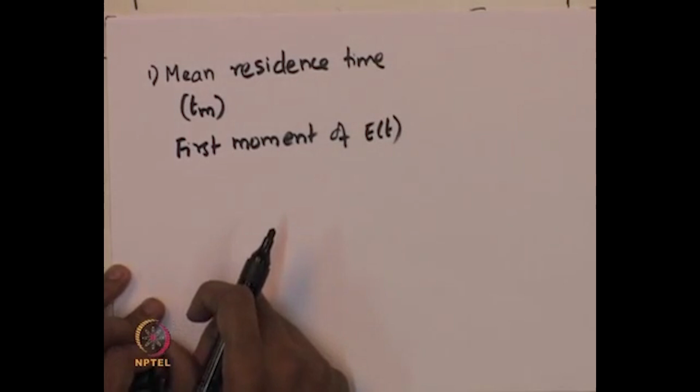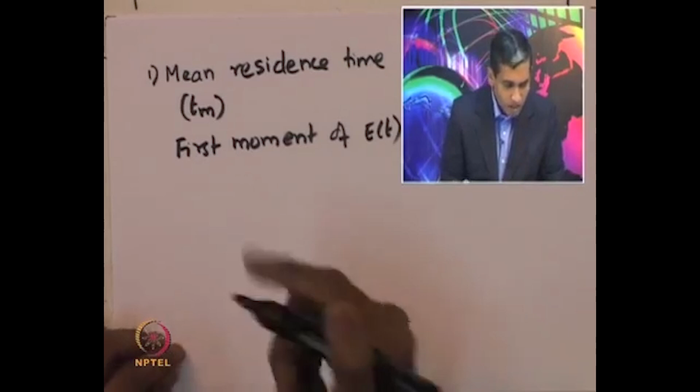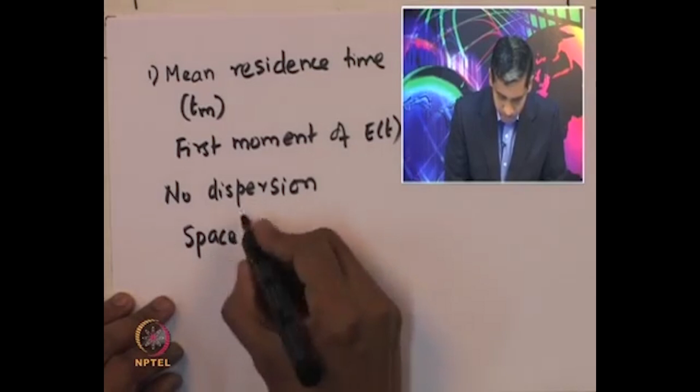So, E of t is actually a distribution, and that distribution can be used to decipher some of the properties of the distribution itself and some of the properties of the reactor system. For example, mean residence time is an important property that is used to control various things in the system. When there is no dispersion across boundaries, that is between the point of injection and the entrance of the reactor, then in these situations the space time tau, which is equal to V by the volumetric flow rate with which the fluid is flowing through the reactor, is equal to the mean residence time itself.

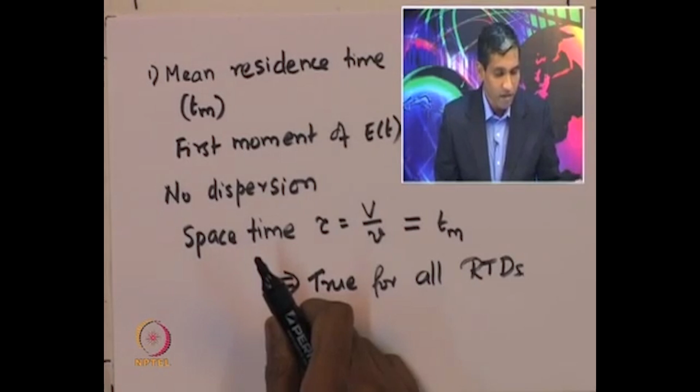Now, this is independent of any RTD function that is representing the non-ideal behavior of the reactor under no dispersion conditions. Irrespective of the RTD function, the mean residence time that we obtain would be exactly equal to the space time of the reactor itself. So, this is true for all RTDs, all residence time distributions, irrespective of what type of reactor, as long as dispersion is absent. So, now let us look at how to calculate the mean residence time from the residence time distribution function E of t.

So, T m, the mean residence time, is given by the first moment, as I mentioned a few moments ago, that is integral 0 to infinity t into E of t dt divided by integral 0 to infinity E of t dt. Because the integral of the E curve between 0 to infinity is equal to 1, this expression can be simplified as integral between 0 to infinity t into E of t dt. So, that is the expression for the mean residence time if the RTD function E of t is known; one can simply plug it in and find the mean residence time.

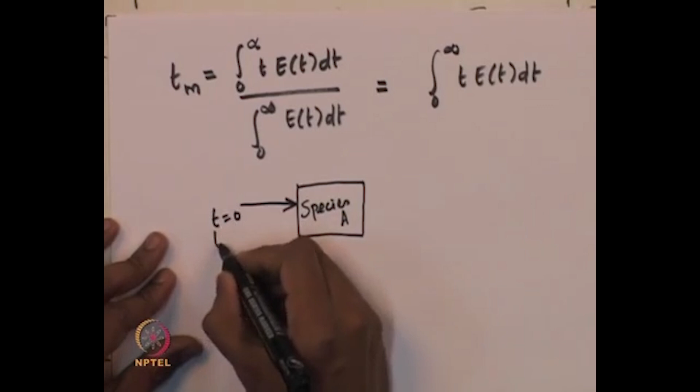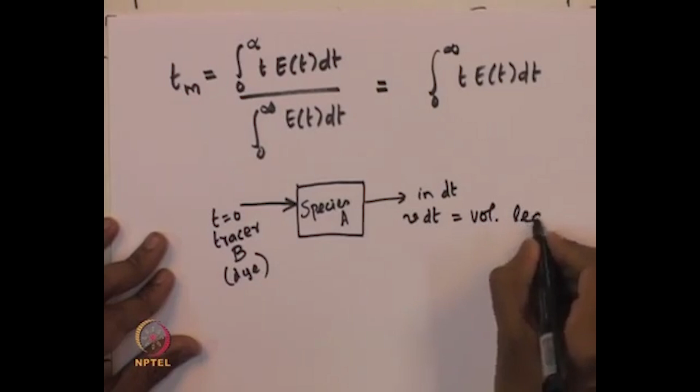Now, let us consider a reactor and assume that it is filled with species A, and at time t equal to 0, a tracer species B, let us say a dye, is injected into the reactor. The amount leaving the reactor in time delta t, whose age lies in that interval, is given by nu times dt, where nu is the volumetric flow rate with which the fluid leaves the reactor, that is the volume of the effluent stream leaving the reactor, not the tracer. So, now suppose we want to know that the species has been there for a long time.

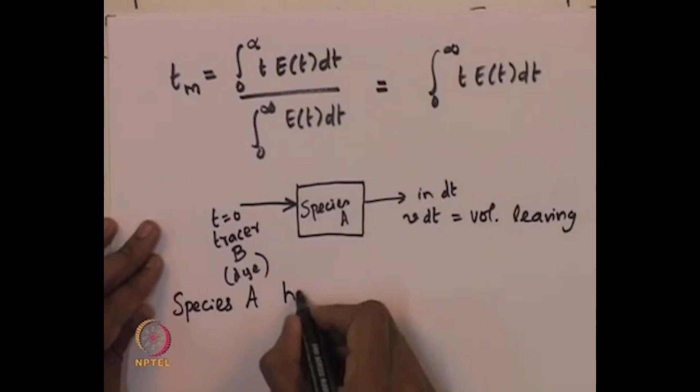So species A has been in the reactor for a long time. Remember nu dt is the volume of the effluent leaving the reactor in this time dt, and if you want to know the volume of species A leaving in that time delta t, that will be given by dV, which is equal to the total volume of the fluid leaving the reactor multiplied by 1 minus F of t. So, F of t is basically the fraction that has been in the reactor for time which is less than t.

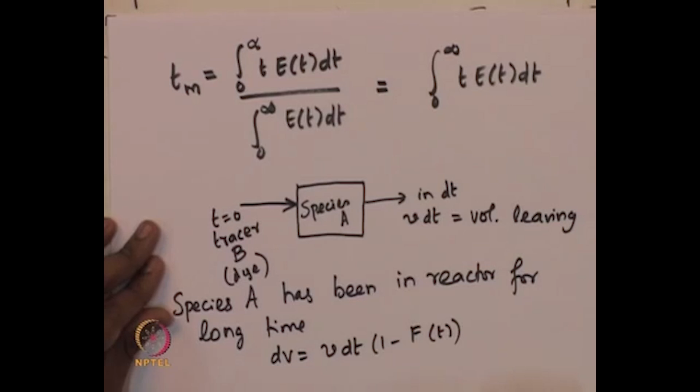So, this is the fraction in the reactor residing for time larger than t. Okay. So, 1 minus F(t) multiplied by the volume of the effluent stream will tell us the amount of species A which is leaving the reactor in that small time dt.

So, now if we sum this over all the molecules of A, then that will tell us the net volume of the species leaving the reactor. So, if we sum over all A molecules, the total volume that is leaving is given by integral 0 to infinity V dt into 1 minus F(t).

So, from here we assume that the volumetric flow rate with which the fluid stream leaves the reactor remains constant. This is generally not true for gas streams, but it is normally true for liquid streams leaving the reactor. If it is a gas stream operated under constant pressure and isothermal conditions, that is constant temperature, and if the number of moles does not change because of the reaction, then one may also assume that the effluent stream volumetric flow rate remains constant.

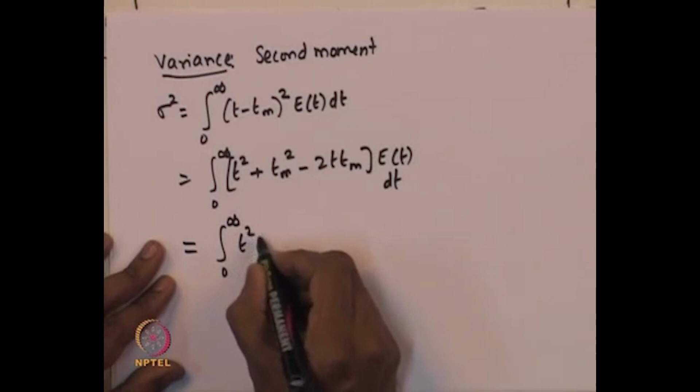So, the sigma square, which is the variance, is given by 0 to infinity (t minus T m) square into E of t dt. And so, now if we expand this square term, we can expand this as 0 to infinity (t square plus T m square minus 2 into t into T m) into E of t dt. So, that is the integral, and this is nothing but 0 to infinity t square E of t dt minus T m square.

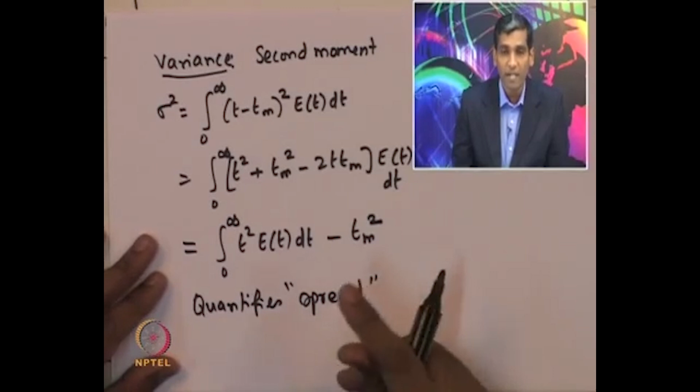So, the variance essentially quantifies the spread in the distribution of the RTD function. So, that is another property that is actually very commonly used in the real systems. And the third property, not very commonly used, is the skewness property. It is called the skewness, and that is obtained using the third moment of the distribution,

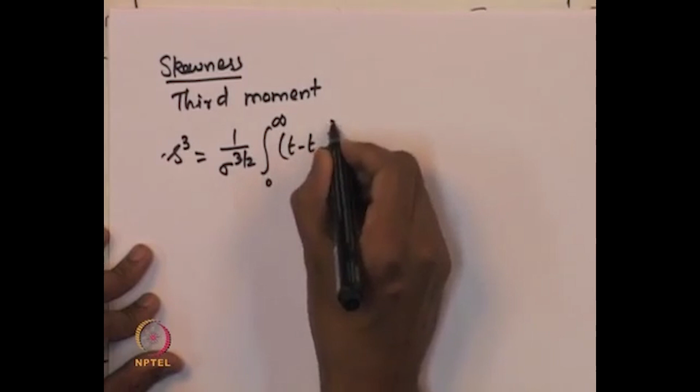and that is given by, if S is the skewness parameter, 1 by sigma to the power of 3 by 2, where sigma is the standard deviation, that is square root of the variance, into 0 to infinity (t minus T m) the whole cube into E of t dt. So, that is the skewness, and this basically reflects the extent to which the residence time distribution function is skewed.

So, now once we know these properties, the next question is, from real reactor data, suppose there is a tracer that goes inside, is it possible to estimate some of these parameters, and what are the steps involved? Okay. So, let us look at how to calculate the mean residence time and sigma square from the actual data.

So, normally the actual data that one would get is the measurement of concentration as a function of time. So, let us say that several concentrations have been measured, from time 1 to 10, and concentration C t has been measured. So, then one needs to create a table where as a first step one calculates E of t. We know the formula for E of t, which is essentially given by C t divided by the integral of C over the whole time domain,

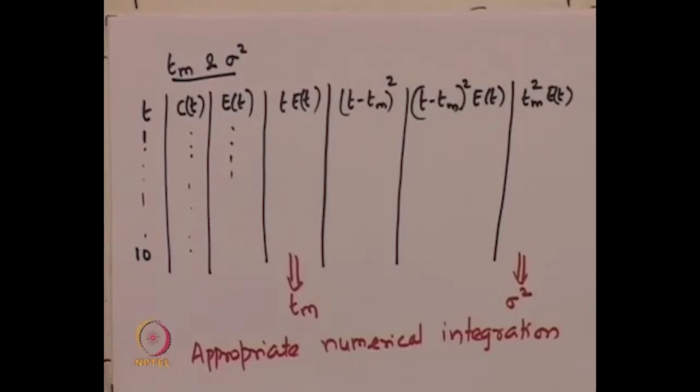In order to complete this table. Once this table is complete, we will be able to estimate the mean residence time and the variance for the distribution that represents the RTD function for the reactor.

Now, suppose there is a reactor and we know the RTD function, okay. Suppose we know the E curve for a given volumetric flow rate V 1. Now, we want to find out the E curve or the RTD function for a different volumetric flow rate. So, let us consider the situation where we are feeding the reactor with a fluid of volumetric flow rate which is less than V 1.

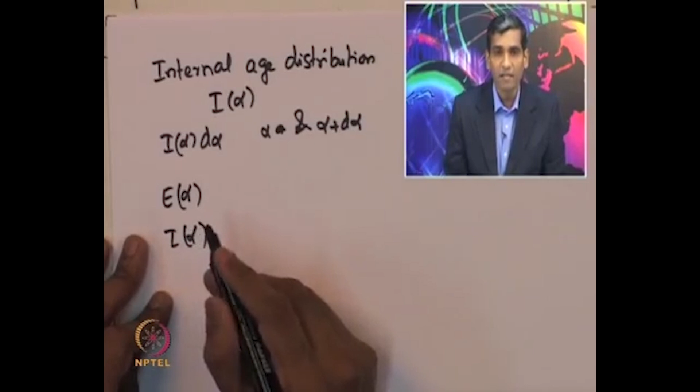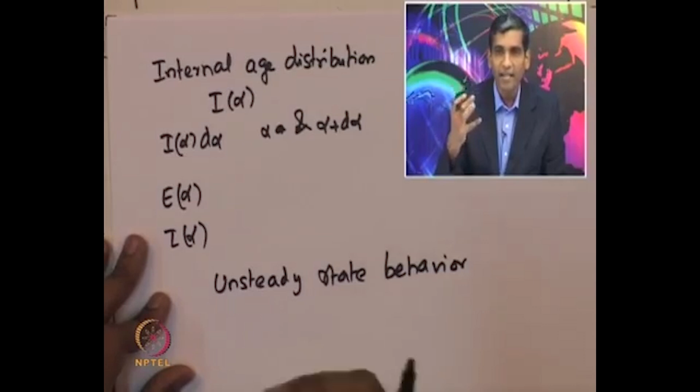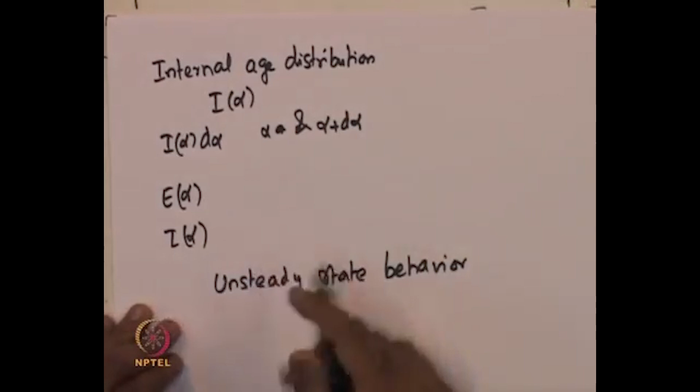So, these two have their own utility, and particularly the age of the fluid elements present inside the reactor has significant importance when one wants to study the unsteady state behavior of a particular reactor. A good example would be a catalytic reaction where the catalyst is decaying with time; then it is important to know the internal age distribution and to consider it in modeling the performance of such a reactor.

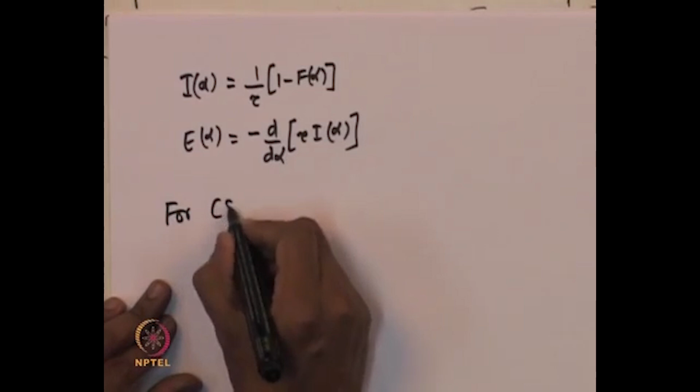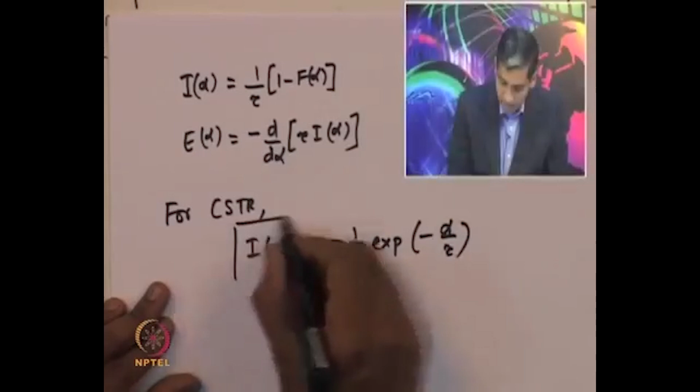So, I(alpha), the internal age distribution, is given by 1 by tau into 1 minus F(alpha), and E(alpha) is given by minus d by d alpha of tau into I(alpha), because of the connection between the E curve and the F curve. So, the relationship between the E curve and the I curve is E(alpha) equals minus d by d alpha of tau into I(alpha). Now, for an ideal CSTR, I(alpha) is given by 1 by tau into exponential of minus alpha by tau. So, that is the internal age distribution for a CSTR. After all these definitions, the E curve, F curve and I curve, and the mean residence time, variance and skewness, let us look at the residence time distribution in ideal reactors.

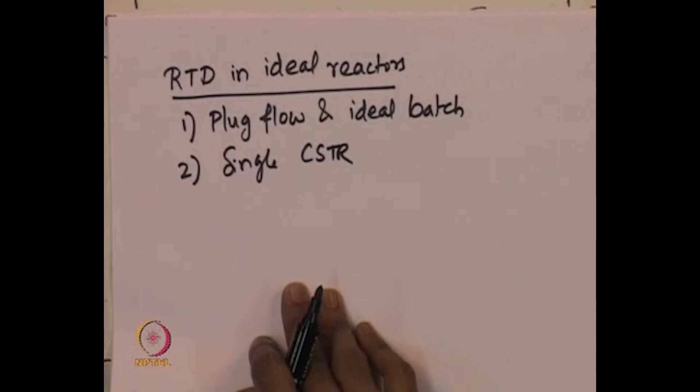So, particularly we will consider two cases. One is plug flow and ideal batch reactor, and the second one is the single CSTR case. So, these two we will look at, and we will attempt to find out how to get the RTD curves for these two types of ideal reactors.

So, let us first consider the plug flow reactor. What is the property of the plug flow reactor? All atoms or all molecules of the material entering the reactor will spend exactly the same amount of time before they leave the reactor, which means that all elements will have exactly the same residence time. So, same residence time for all fluid elements entering and leaving the reactor.

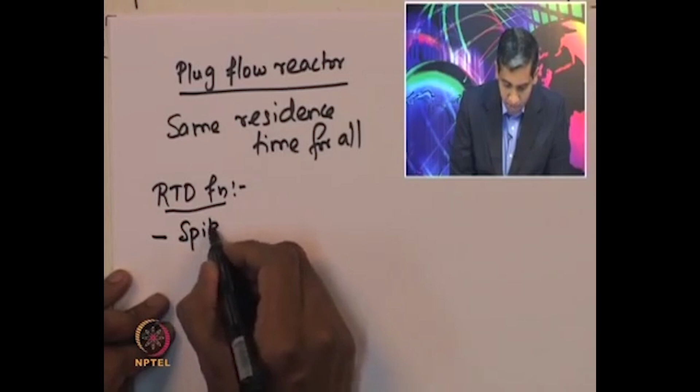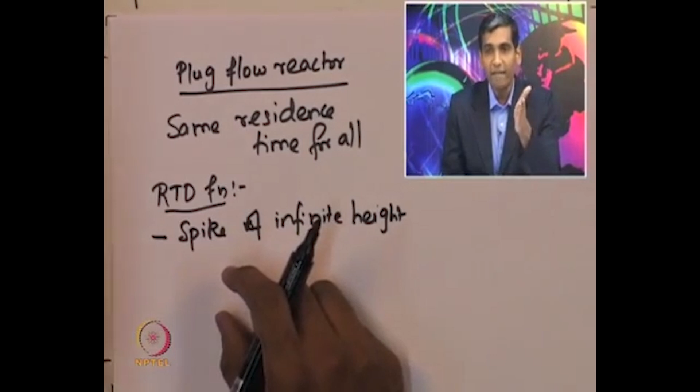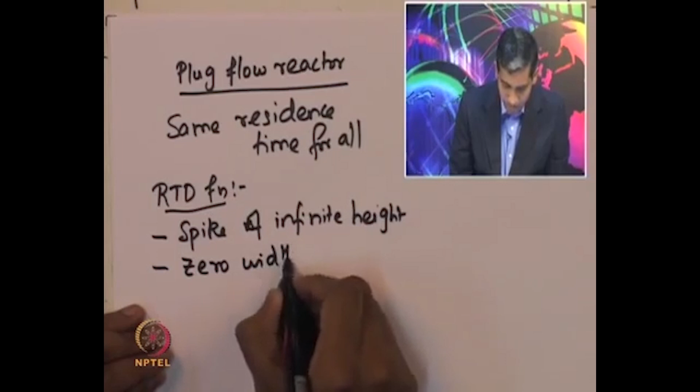So, therefore, the RTD function must have the following properties. First, it must have a spike of infinite height, because all of them will have the same residence time; they will all leave like a plug. So the E curve must have a spike of infinite height and 0 width, and the area under the curve should be equal to 1. The spike will be exactly at the mean residence time, and that is very important, because that property captures the nature of the plug flow reactor.

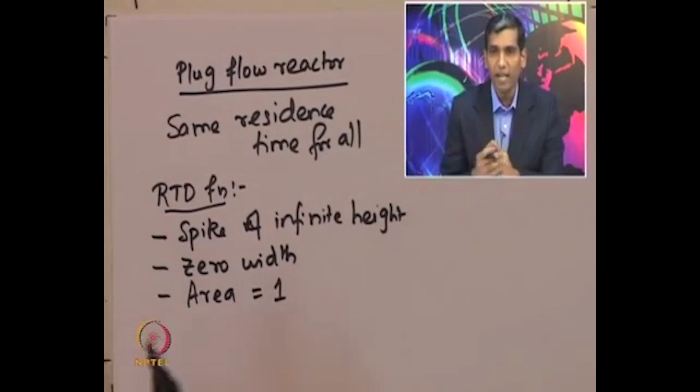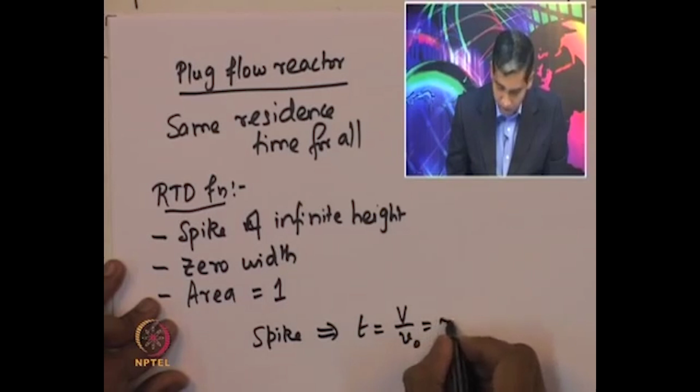So, the spike will be exactly at t equal to V by v naught, that is equal to tau, the space time of the reactor, and because there is no dispersion, the space time will also be equal to the mean residence time, or in non-dimensional terms, theta equal to t by tau equal to 1. So the E curve for the plug flow reactor should simply be represented by the Dirac delta function centered at the space time of the reactor.

So, this is the Dirac delta function, and it is defined as follows. Delta of x is equal to 0 if x is not equal to 0, and it is equal to infinity when x is exactly equal to 0. And the integral from minus infinity to plus infinity of delta x dx should be equal to 1. That is the property of the Dirac delta function.

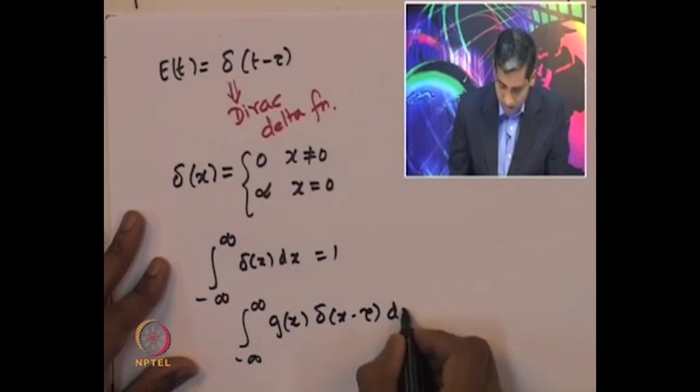In addition, another important property is that it satisfies the convolution integral, that is equal to g of tau. So, the integral of g of x, some function of x, multiplied by the delta function dx, is equal to g evaluated at tau, where x minus tau is equal to 0. That is where the spike is present.

So, now let us calculate the mean residence time for this RTD curve. The mean residence time t m is given by integral 0 to infinity t into E of t dt. That is the definition in terms of the RTD function. Plugging in the E curve for the plug flow reactor, it is 0 to infinity t into delta of t minus tau dt, and that is nothing but tau itself.

So, therefore, the mean residence time is exactly equal to the space time, and one would easily guess this, because all material entering and leaving the plug flow reactor has exactly the same residence time, and the E curve is centered at the space time. So the mean residence time must be exactly equal to the space time of the plug flow reactor, which is also clearly shown by the RTD function.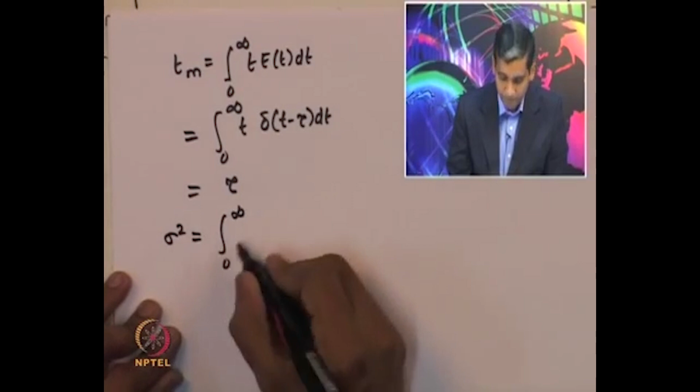So, now let us look at the second moment, that is the variance of the distribution. That is given by 0 to infinity (t minus t m) whole square into E of t dt. Now we open up the t minus t m whole square, and if one integrates, this essentially reduces to integral 0 to infinity t square delta of t minus tau dt plus integral 0 to infinity t m square delta of t minus tau dt minus 2 integral t t m delta of t minus tau dt.

And that is essentially, so the first term here, because of the property of the delta function, will simply be equal to tau square, and the second will simply be equal to plus Tm square. And the third one will simply be 2 into t into Tm, t into delta function integral; Tm is constant, so that will come out of the integral, and t into the delta function will essentially be equal to the mean residence time. So that will be equal to 2 Tm square, and that is equal to 0, because the mean residence time and the space time are exactly equal.

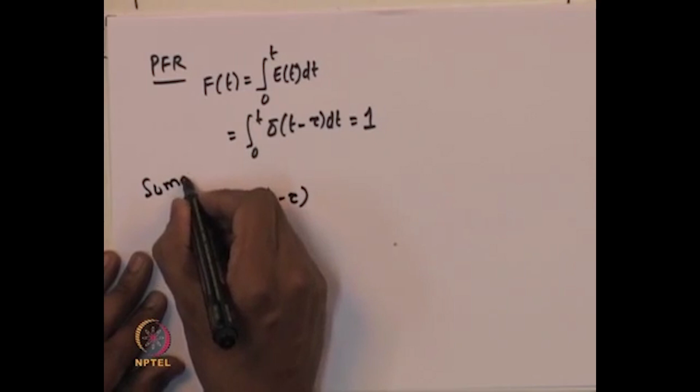Where the residence time distribution function is essentially given by delta of t minus tau, and the mean residence time is equal to the space time of the reactor, which is the volume divided by the volumetric flow rate, and sigma square, the variance, is actually 0, and F of t is essentially equal to 1.

So, therefore, if we attempt to sketch the E curve and the F curve, we will find that, so that is time, and suppose this is tau here. At t equal to 0, a spike tracer is put into the plug flow reactor. If that is the spike, then exactly after a delay of tau time, which is the space time of the plug flow reactor, the same quantity of tracer will come out of the reactor. So, that is the outstream, and the height will be infinity.

Okay. Now, so this is the E curve, and suppose I look at the F curve of the reactor, then exactly at t equal to tau, that is the space time or the mean residence time of the plug flow reactor, the F value will be exactly equal to 1. So, that is the E curve and the F curve for a plug flow reactor.

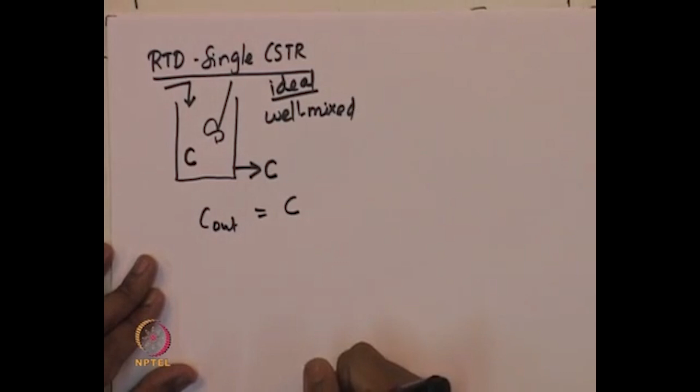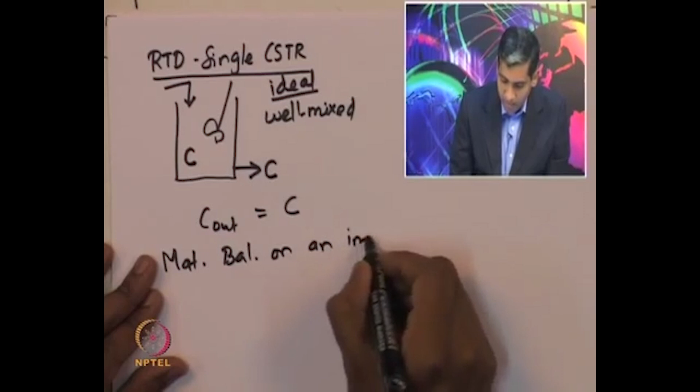And let us now write a material balance on an inert tracer. Suppose an inert tracer is fed into the reactor, and the concentration of the inert tracer is C naught at t equal to 0. So, at time t equal to 0, some C naught quantity of tracer is fed into the reactor, and now we can write a material balance in order to find out what is the RTD function. So, for any time greater than 0, whatever tracer is entering the reactor minus whatever is leaving should be equal to the accumulation of the tracer inside the reactor.

Now, if we assume that it is a pulse tracer, which means that the time at which the tracer is fed into the CSTR is exactly t equal to 0, and nothing before and nothing after t equal to 0. So, therefore, at any time greater than 0, no tracer is actually entering the reactor.

So, therefore, the inlet is 0 minus what leaves is the volumetric flow rate v of the effluent stream multiplied by the concentration of the tracer C, and that should be equal to V into dC by dt, which is the accumulation of the tracer in the CSTR.

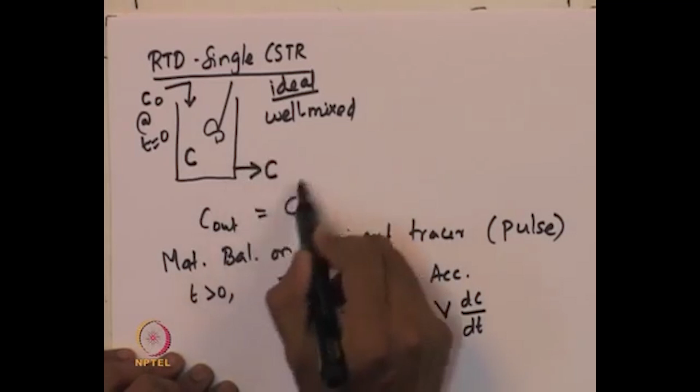Now, because the concentration of the species inside the reactor is equal to the concentration at which the species is leaving the reactor, the C here essentially represents the outlet concentration of the species from the reactor. That reflects the concentration with which it leaves the reactor in the effluent stream.

So, now one can integrate this expression to find that C of t is equal to C naught into exponential of minus t by tau, where C naught is the initial pulse tracer concentration, and from this we can find that E of t is given by C of t divided by integral 0 to infinity C of t dt.

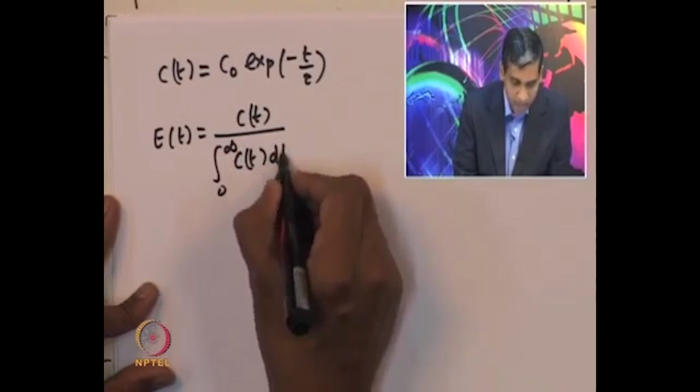So, now we know the expression for C of t. We can plug that in here, and it is exponential of minus t by tau divided by integral 0 to infinity exponential of minus t by tau. Performing the integration, because C naught is constant, one can cancel C naught from the numerator and denominator, and this will be equal to 1 by tau into exponential of minus t by tau. So, that will be the residence time distribution function for a single CSTR.

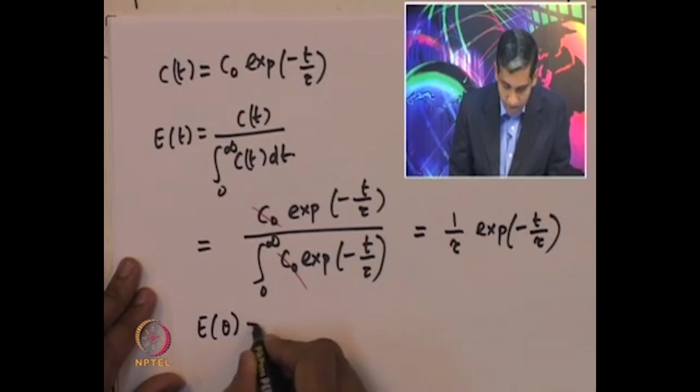Now, in terms of the normalized RTD function, E of theta is given by exponential of minus theta, where theta is t by tau, and E of theta is nothing but tau into E of t. So, that is the normalized residence time distribution function.

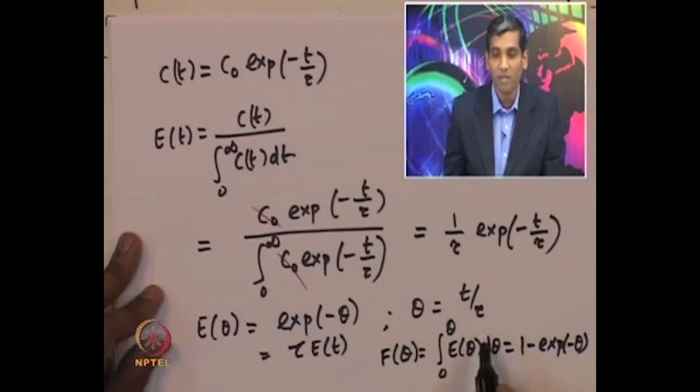Now we can find the F curve. F of theta is integral 0 to theta E of theta d theta, that is 1 minus exponential of minus theta. So, that is the expression for the F curve, where theta is t by tau and tau is V by v naught, the space time of the reactor.

So, let us attempt to sketch the E curve and the F curve. The E curve, the normalized RTD function, essentially looks like this. It is an exponential decay, and the corresponding F curve looks like this. So, this is 1 and this is theta.

And the mean can be estimated as t m, equal to integral 0 to infinity t into E of t dt, which is integral 0 to infinity t by tau into exponential of minus t by tau, and that should be equal to tau. So, that is exactly what we observed before. If there is no dispersion, then irrespective of the RTD, the mean residence time should be equal to the space time of the reactor itself.

And now, the variance sigma square is given by integral 0 to infinity t minus t m square into E of t dt, and that should be equal to tau square integral 0 to infinity x minus 1 the whole square into exponential of minus x dx, where the change of variable is x equal to t by tau. Integrating this standard expression gives tau square, which means that the standard deviation of the distribution is equal to the space time of the reactor itself.

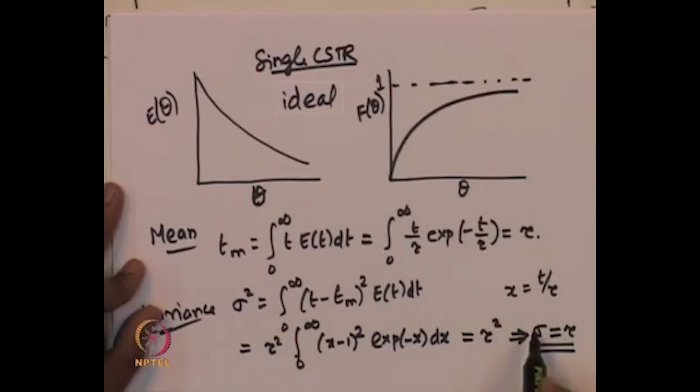So, for a single CSTR, the mean residence time is equal to the space time of the reactor, and the standard deviation of the residence time function is also equal to the mean residence time of the reactor itself.

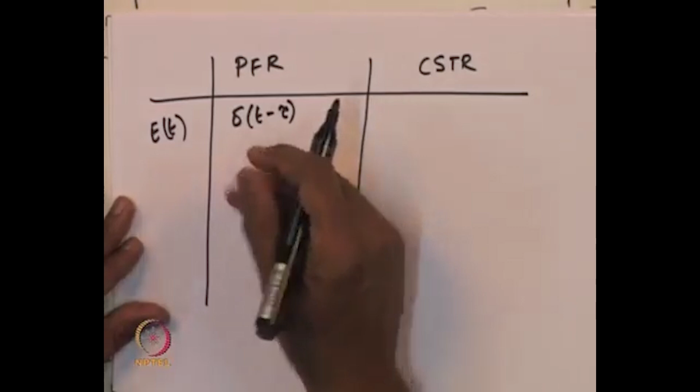So, now if we compare the RTD function and the various properties, we can summarize the function and the properties that we have found so far for a plug flow reactor and a CSTR. The residence time distribution function E of t is essentially the delta function for a plug flow reactor, which means that there is just a delay, and whatever is fed into the reactor is going to come out of the reactor exactly after a certain delay, and the delay is given by the space time of the reactor.

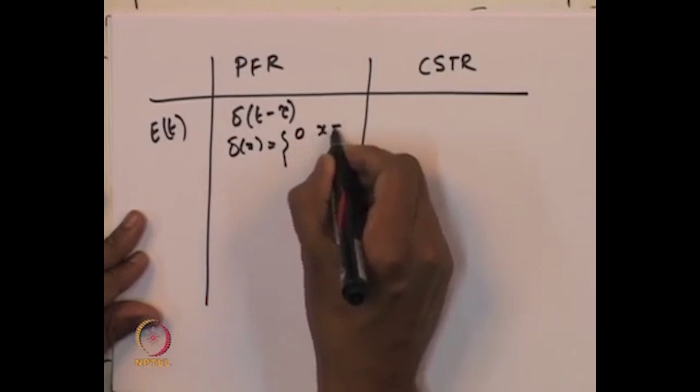And here delta x is defined as 0 for x not equal to 0 and infinity for x equal to 0. The corresponding RTD function for a CSTR is 1 by tau exponential of minus t by tau, where tau is the space time, given by the volume of the reactor divided by the volumetric flow rate, V by v. The mean residence time for a plug flow reactor is tau, and it is the same for the CSTR because there is no dispersion, so the mean residence time should be equal to the space time of the reactor itself.

The variance for a plug flow reactor is 0, while for a CSTR it is equal to the square of the space time of the reactor. The F curve is 1 for a plug flow reactor, and 1 minus exponential of minus t by tau for a CSTR. So, that summarizes the RTD function and the various properties of the function for the plug flow reactor and a CSTR.

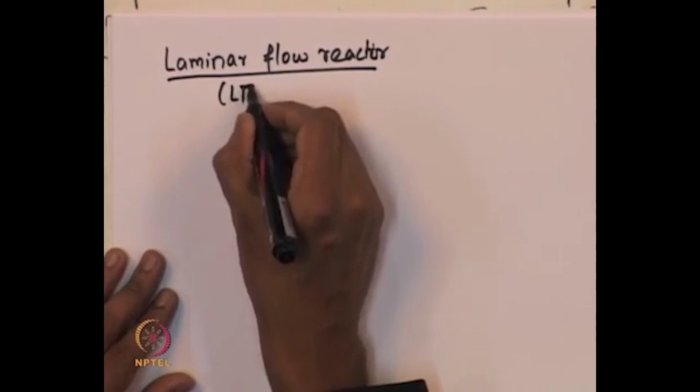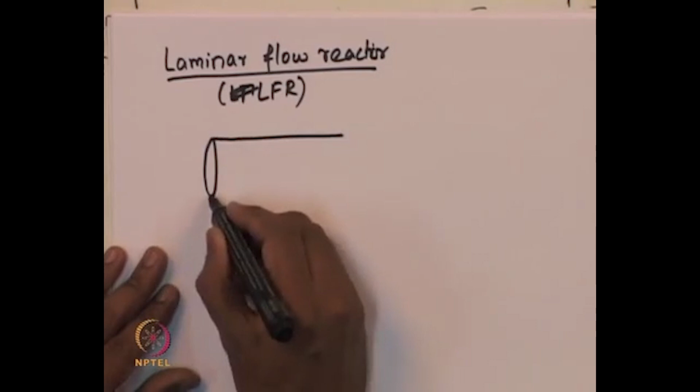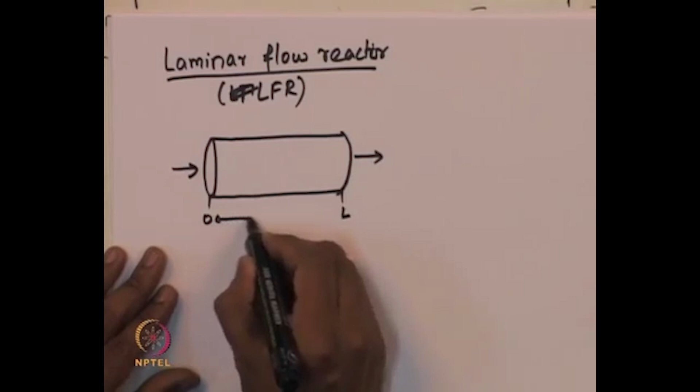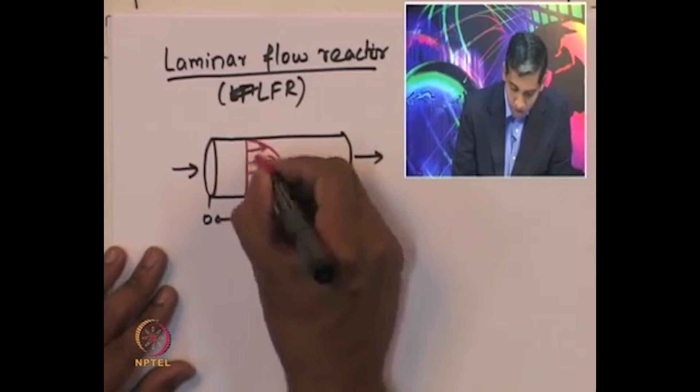So, next let us look at another reactor, the laminar flow reactor. Let us try to estimate the RTD function for the laminar flow reactor, referred to as LFR hereafter. Suppose there is a tube and a fluid stream entering at 0 and leaving at L, the length of the reactor. The fluid is entering under laminar conditions, and it is expected that there will be a parabolic velocity profile, with maximum at the center and 0 near the walls.

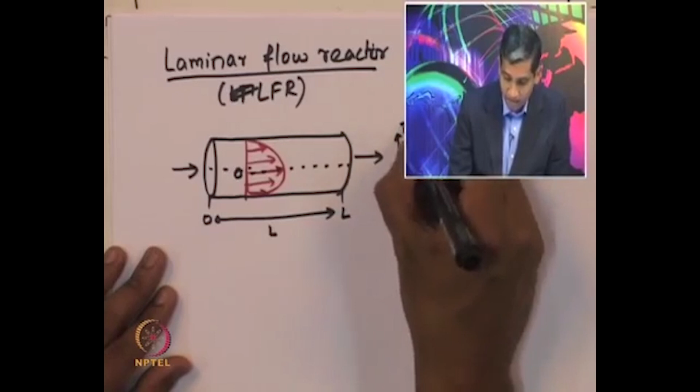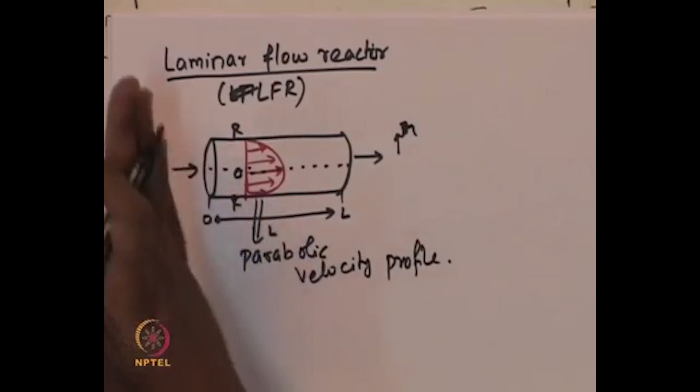So, if that is the center of the reactor, that is r equal to 0, and I label this coordinate as r. At r equal to 0 it will be maximum velocity, and at r equal to R, which is the periphery, the velocity will be 0. So, that is the parabolic velocity profile with which the fluid is flowing through the reactor.

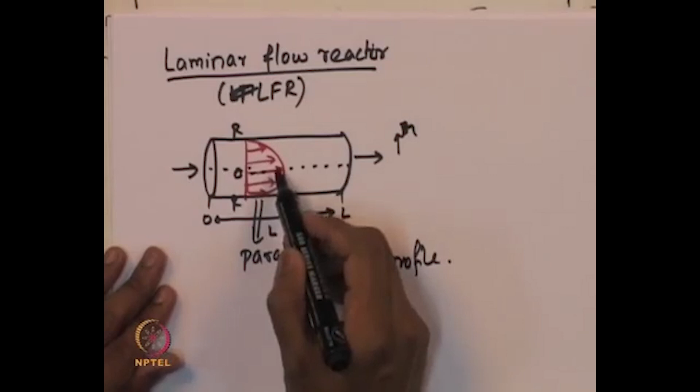Now, clearly this suggests that the fluid elements at the center will have the shortest residence time because they have the maximum velocity, and so they will leave the reactor much faster than the other fluid elements present at radial locations other than 0. Therefore, the velocity profile u is given by u max, the maximum velocity at the center, multiplied by 1 minus r by R the whole square.

Now, often this maximum velocity may not be known. Instead what may be known is the average velocity, the velocity of the fluid stream averaged across the whole cross section, and that can be estimated from the local velocity expression. So, u average at a given cross section is given by volumetric flow rate divided by the area of the reactor at that cross section, which is 1 by pi R square into integral 0 to R of u max into 1 minus r by R the whole square into 2 pi r dr.

So, here I have assumed that if this is the cross section of the reactor, there is a small element located at a distance r from the center, and its thickness is dr. Therefore, the volumetric flow rate of the fluid at any cross section is given by the local velocity multiplied by 2 pi r dr, integrated between 0 and R. That gives the volumetric flow rate at that cross section, and pi R square is the corresponding area at that cross section.

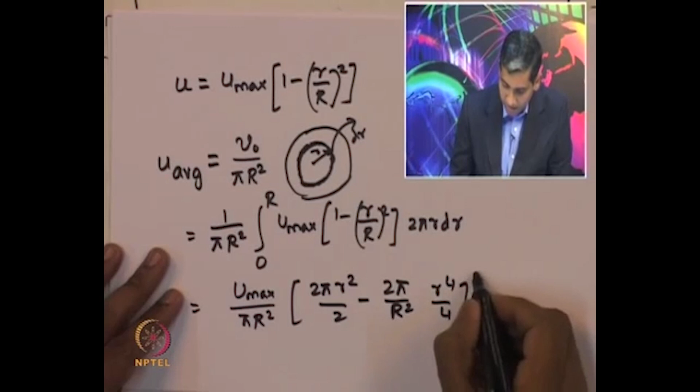So, from integrating this expression, we will find that it will be equal to u max by pi R square multiplied by 2 pi R square by 2 minus 2 pi by R square into r power 4 by 4, and the limits are 0 to R, and that is equal to u max by 2.

So, the maximum velocity is simply twice the average velocity, that is averaged over the cross section of the reactor, and in fact, the average velocity is also called the cup mixing average, and so u max is equal to 2 times u average.

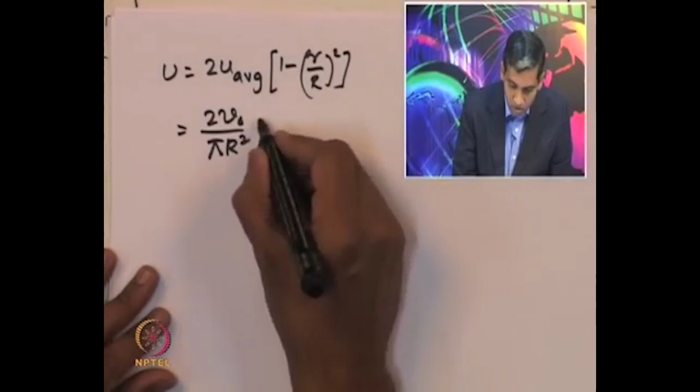So, substituting this in the expression for the velocity, we can rewrite the velocity expression as u equal to 2 times u average multiplied by 1 minus r by R the whole square, and that is equal to 2 v naught by pi R square. V naught is the volumetric flow rate with which the fluid is flowing at that cross section, into 1 minus r by R the whole square.

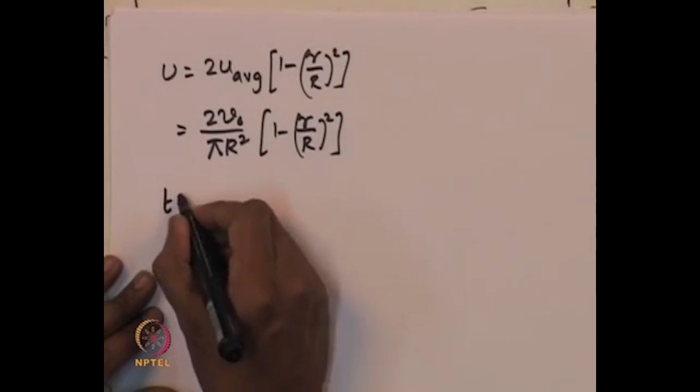So, that is the expression for the velocity with which the fluid is flowing as a function of the radial position. Now, we can estimate the time that is spent by the fluid particles entering at a given location r.

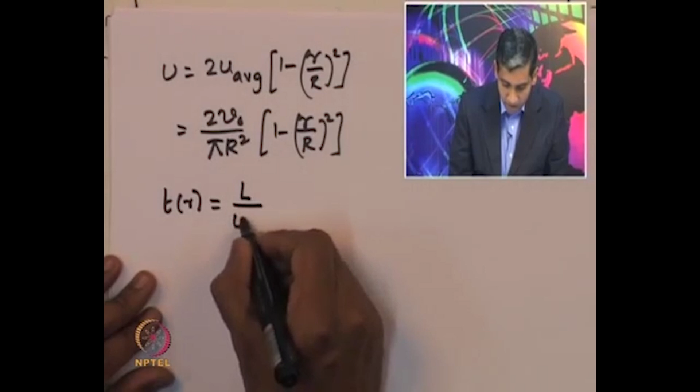So, that is given by the length of the reactor L divided by the velocity with which the fluid is flowing at that radial location r, which is u of r, and that is given by pi R square by v naught into L into 1 by 2 times 1 minus r by R the whole square.

So, that is the time taken by different fluid elements entering the reactor at any r location. So, that is equal to tau divided by 2 into 1 minus r by R the whole square, where tau is the space time of the reactor, which is given by V divided by v naught.

So, now we need to find out what is the RTD function E of t. In order to find that, we need to know what is the fraction of this fluid that is leaving and what is the age of that particular fluid. So, now the volumetric flow rate between r and r plus dr.

So, that is the volumetric flow rate of the fluid flowing between r and r plus dr, and that is given by dV, that is equal to u of r into 2 pi r dr. So, that is the volumetric flow rate of the fluid flowing in this element dr, that is between r and r plus dr.

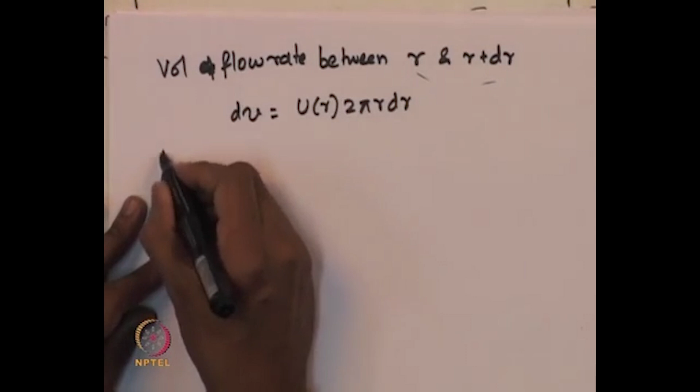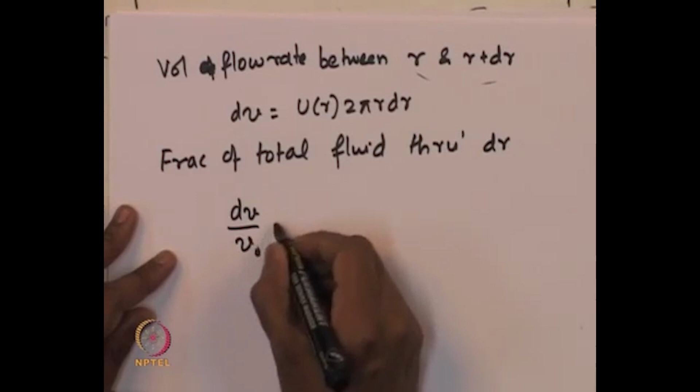So, now the fraction of the total that is flowing through this small element dr is given by dV divided by v naught, where v naught is the total volumetric flow rate. dV by v naught gives the fraction of the fluid flowing through this element dr. So, that is given by u of r divided by v naught into 2 pi r dr.

So, that is the fraction of the fluid flowing through this element dr, and in fact, that is nothing but E of t into dt, because the fraction of the fluid flowing through this small element dr, the fluid between r and r plus dr, which is spending the time between t and t plus delta t, is what is given by the RTD function E of t dt, and that should be equal to dV by v naught, whose residence time is between t and t plus delta t.

So, what we have seen so far in this lecture is different properties of the residence time distribution, which is the mean. We looked at the variance and the skewness, and then we moved on to the residence time distribution of the ideal reactors. Particularly, we considered the plug flow reactor, found its residence time distribution and its properties, and specifically the E curve and the F curve as a function of time.